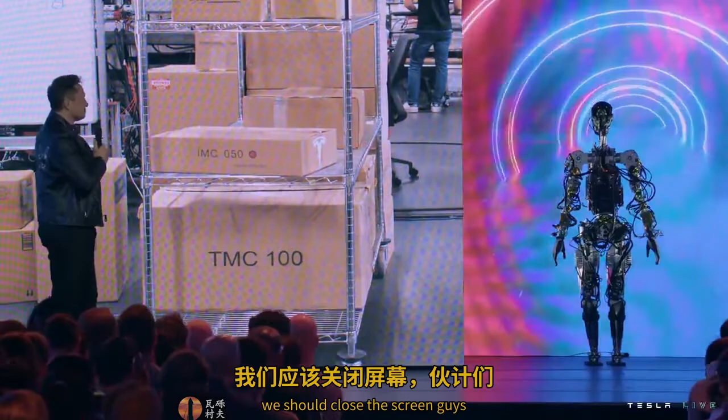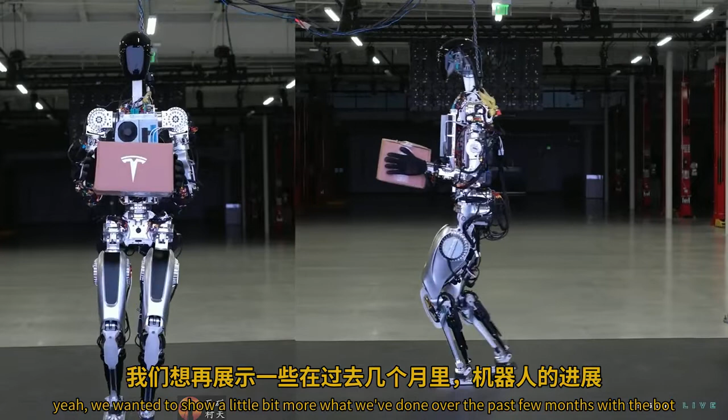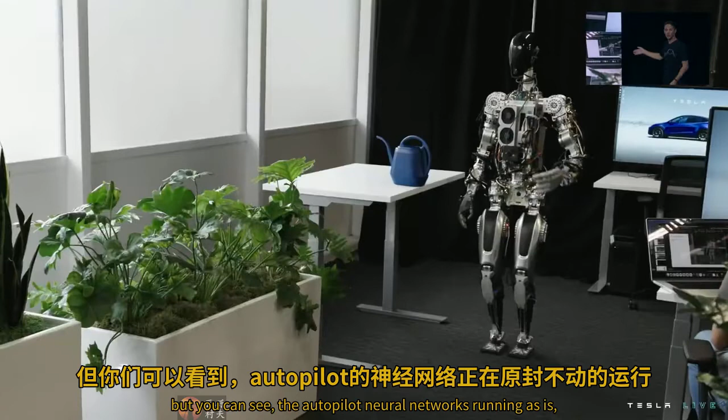Yeah, we wanted to show a little bit more what we've done over the past few months with the bot, beyond just walking around and dancing on stage. Just humble beginnings, but you can see the Autopilot neural networks running as is, just retrained for the bot directly on that new platform. That's my watering can. Yeah, when you see a rendered view, that's the world the robot sees. So it's very clearly identifying objects, like this is the object it should be picking up.

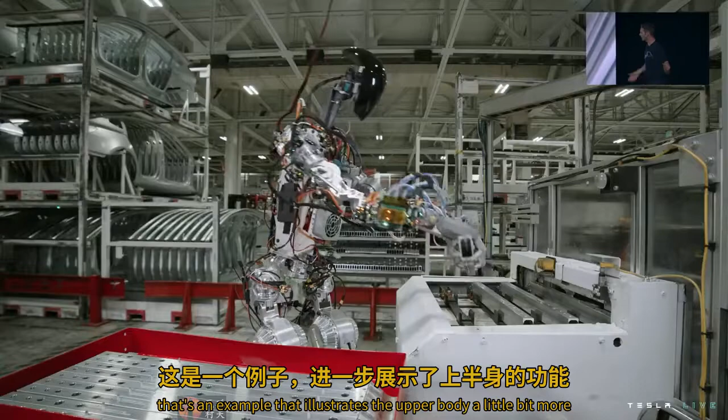We use the same process as we did for Autopilot to collect data and train neural networks that we then deploy on the robot. That's an example that illustrates the upper body a little bit more. Something that we'll try to nail down over the next few months, I would say, to perfection. This is really an actual station in the Fremont factory as well that it's working at.

And that's not the only thing we have to show today, right? Yeah, absolutely. So what you saw was what we call Bumble C. That's our sort of rough development robot using semi-off-the-shelf actuators. But we actually have gone a step further than that already. The team's done an incredible job.

And we actually have an Optimus bot with fully Tesla-designed and built actuators, battery pack, control system, everything. It wasn't quite ready to walk, but I think it will walk in a few weeks. But we wanted to show you the robot, something that's actually fairly close to what will go into production, and show you all the things it can do. So let's bring it out. Do it.

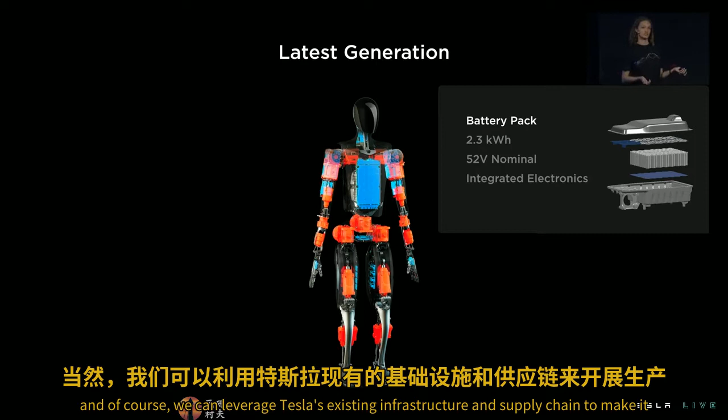So going on to our brain, it's not in the head, but it's pretty close. Also in our torso, we have our central computer.

As you know, Tesla already ships full self-driving computers in every vehicle we produce. We want to leverage both the autopilot hardware and software for the humanoid platform, but because the requirements and form factor are different, we're going to change a few things first.

It's still going to do everything that a human brain does: processing vision data, making split-second decisions based on multiple sensory inputs, and also communications. To support communications, it's equipped with wireless connectivity as well as audio support. It also has hardware-level security features, which are important to protect both the robot and the people around it.

So now that we have our core, we're going to need some limbs on this guy. We'd love to show you a little bit about our actuators and our fully functional hands as well. But before we do that, I'd like to introduce Malcolm, who's going to speak about our structural foundation for the robot.

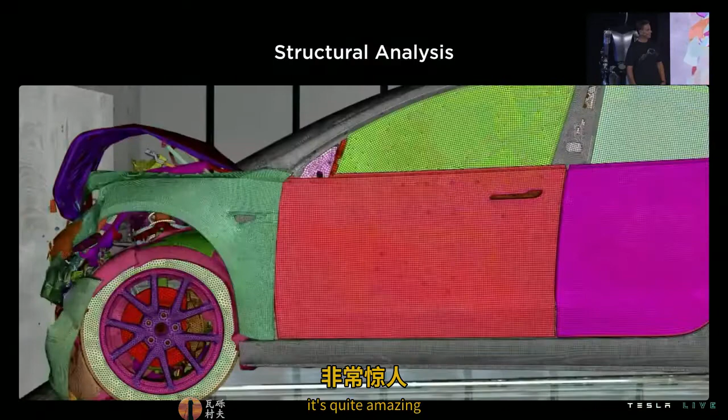Just to give you an idea of the complexity of this model, it includes every nut, bolt, and washer, every spot weld, and it has 35 million degrees of freedom. It's quite amazing, and it's true to say that if we didn't have models like this, we wouldn't be able to make the safest cars in the world.

So can we utilize our capabilities and methods from the automotive side to influence a robot? Well, we can make a model, and since we had crash software, we're using the same software here, we can make it fall down. The purpose of this is to make sure that if it falls down, ideally it doesn't, but it's superficial damage.

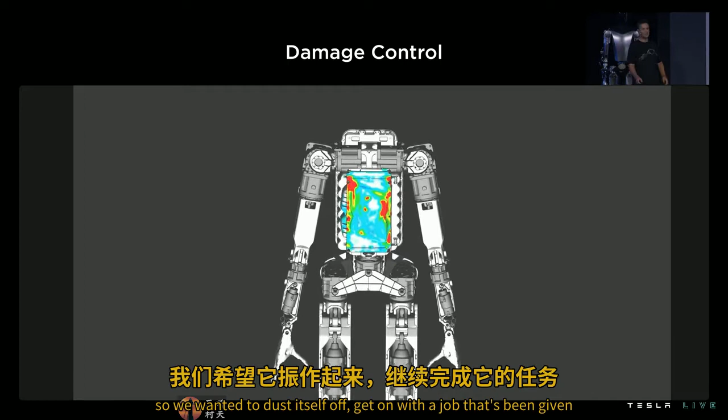We don't want it to, for example, break its gearbox in its arms. That's equivalent of a dislocated shoulder of a robot - difficult and expensive to fix. So we want it to dust itself off and get on with the job it's been given.

We can also take the same model and drive the actuators using the inputs from a previously solved model, bringing it to life. So this is producing the motions for the tasks we want the robot to do.

These tasks are picking up boxes, turning, squatting, walking upstairs. Whatever the set of tasks are, we can play to the model. This is showing just simple walking. We can create the stresses in all the components, which helps us optimize them.

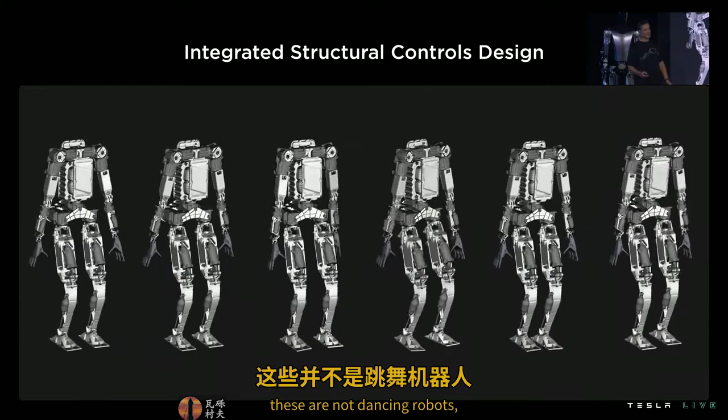These are not dancing robots. These are actually the modal behavior, the first 5 modes of the robot. Typically, when people make robots, they make sure the first mode is up around the top single figures, towards 10 hertz. The reason is to make the controls of walking easier - it's very difficult to walk if you can't guarantee where your foot is wobbling around. That's okay if you make one robot.

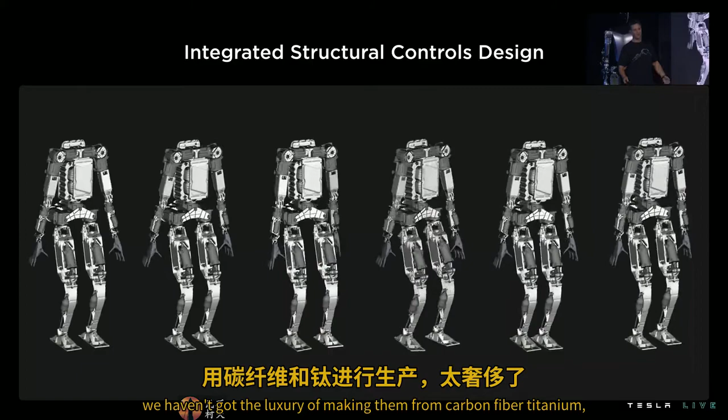We want to make thousands, maybe millions. We haven't got the luxury of making them from carbon fiber and titanium - we want to make them from plastic. Things are not quite so stiff, so we can't have these high targets. I call them dumb targets. We've got to make them work at lower targets.

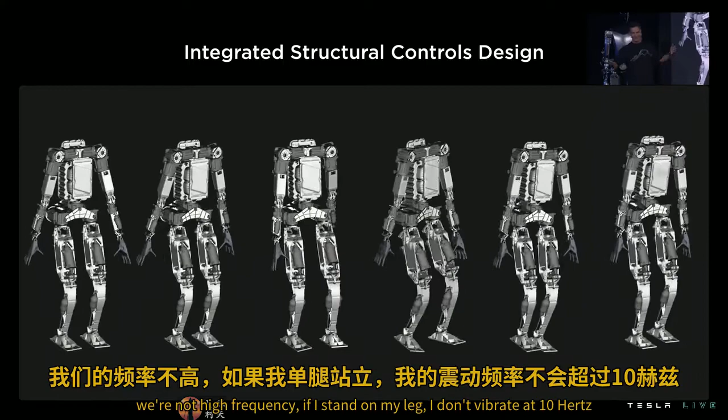So is that going to work? Well, if you think about it - sorry about this - but we're just bags of soggy jelly and bones thrown in. We're not high frequency. If I stand on my leg, I don't vibrate at 10 hertz. People operate at low frequency, so we know the robot actually can. It just makes controls harder.

So we take the information from this, the modal data and the stiffness, and feed that into the control system. That allows it to walk.

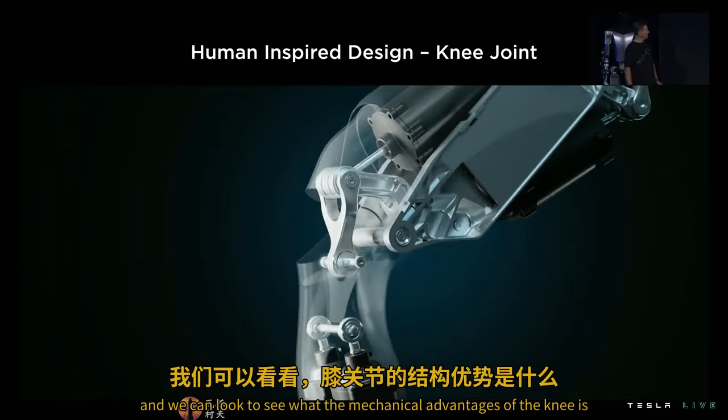Just changing tack slightly, looking at the knee. We can take some inspiration from biology and look to see what the mechanical advantage of the knee is. It turns out it actually represents quite similar to a 4-bar link, and that's quite non-linear. That's not surprising, really, because if you think when you bend your leg down, the torque on your knee is much more when it's bent than when it's straight.

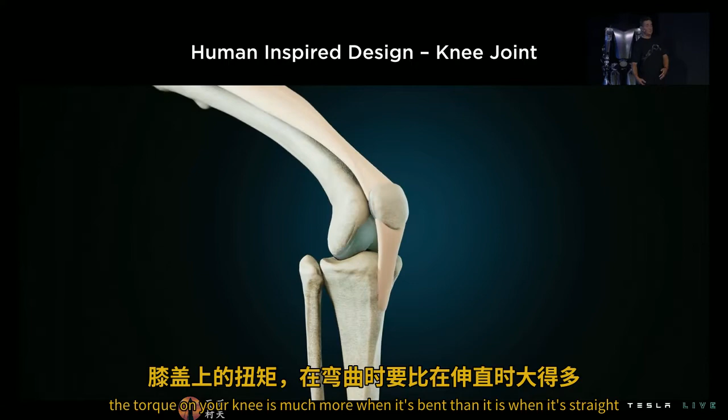So you'd expect a non-linear function, and in fact the biology is non-linear. This matches it quite accurately.

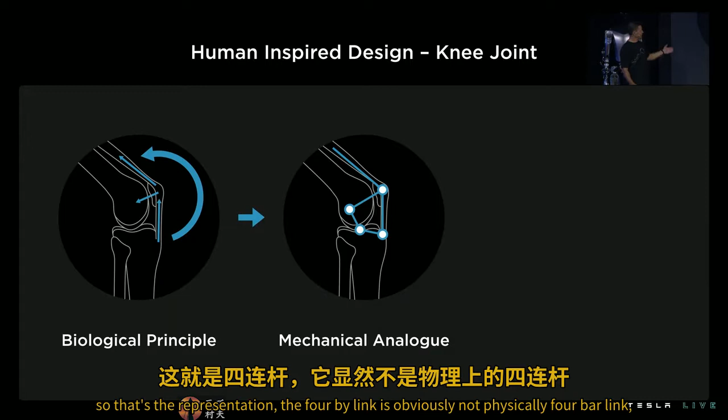So that's a representation. The 4-bar link is obviously not physically a 4-bar link, but as I said, the characteristics are similar. Me bending down though, that's not very scientific. Let's be a bit more scientific.

We've played all the tasks through this graph, and this is showing picking things up, walking, squatting, the tasks we did on the stress, and that's the torque seen at the knee against the knee bend on the horizontal axis.

This is showing the requirement for the knee to do all these tasks. I've then put a curve through it, surfing over the top of the peaks, and that's saying this is what's required to make the robot do these tasks.

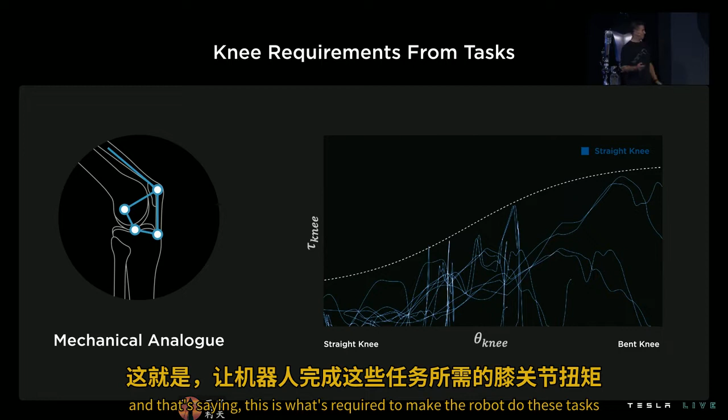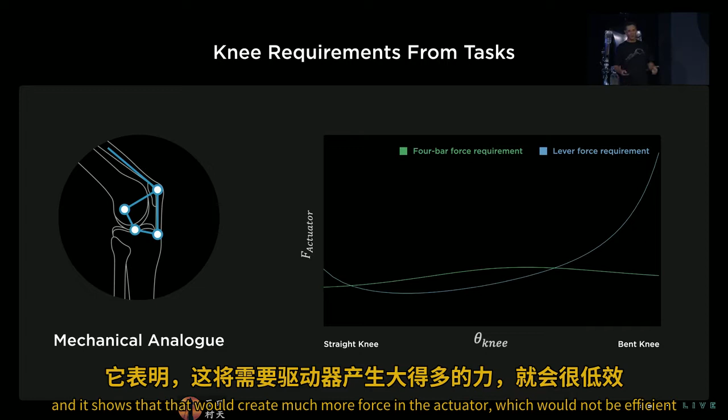So what does that look like in practice? Well, as you'll see, it's very tightly packaged in the knee. You'll see it go transparent in a second. You'll see the 4-bar link there. It's operating on the actuator. This is determining the force and the displacements on the actuator.

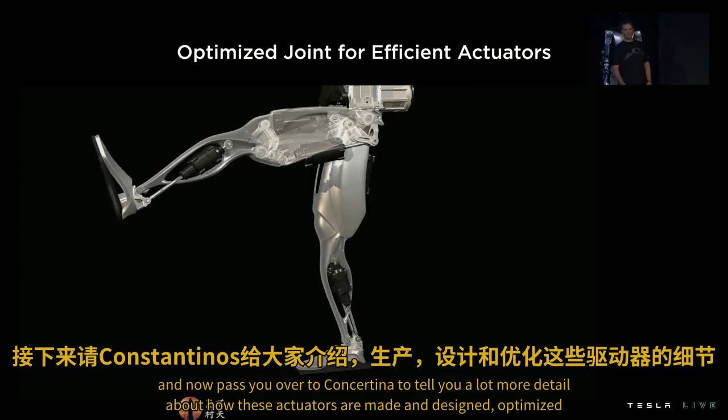I'll now pass you over to Constantinos, who'll tell you a lot more detail about how these actuators are made and designed and optimized. Thank you.

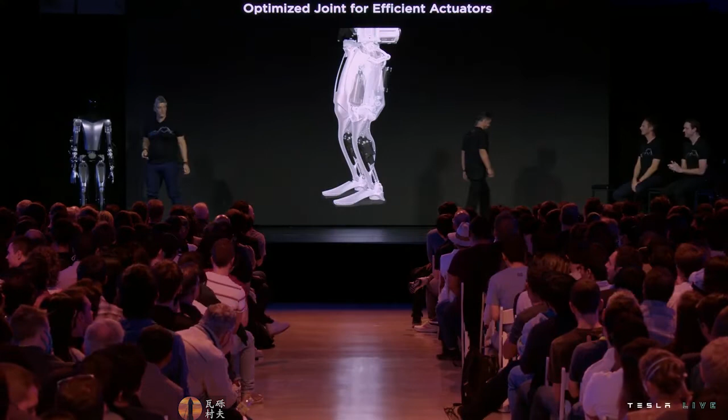So I would like to talk to you about the design process and the actuator portfolio in our robot. There are many similarities between a car and a robot when it comes to powertrain design.

The most important thing that matters here is energy, mass, and cost. We are carrying over most of our designing experience from the car to the robot.

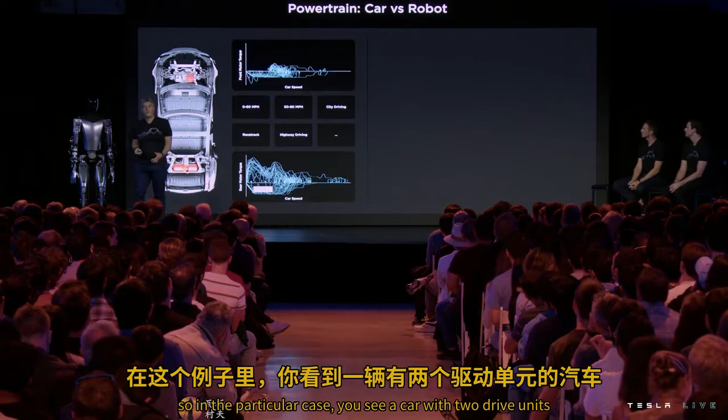So in this particular case, you see a car with 2 drive units, and the drive units are used in order to accelerate the car's 0 to 60 miles per hour time, or drive a city drive cycle.

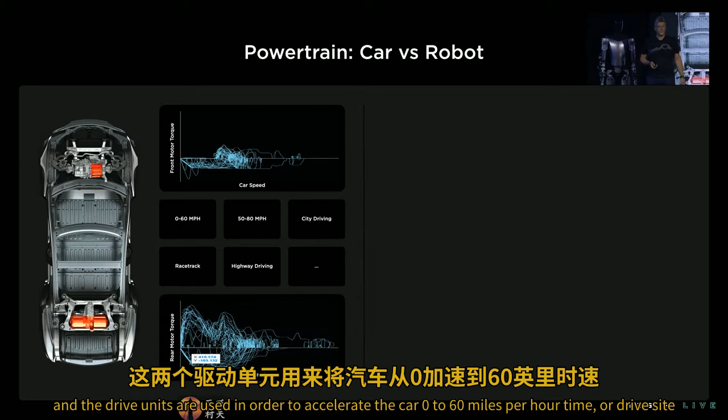While the robot has 28 actuators, it's not obvious what the tasks are at actuator level. So we have tasks that are higher level, like walking or climbing stairs or carrying a heavy object, which need to be translated into joint specs.

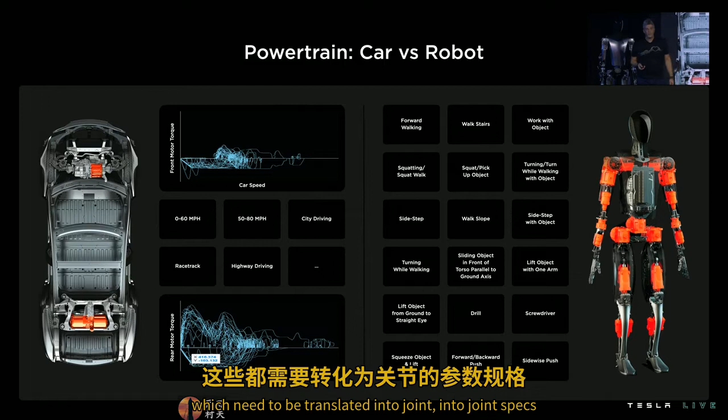Therefore, we use our model that generates the torque speed trajectories for our joints, which is subsequently fed into our optimization model to run through the optimization process.

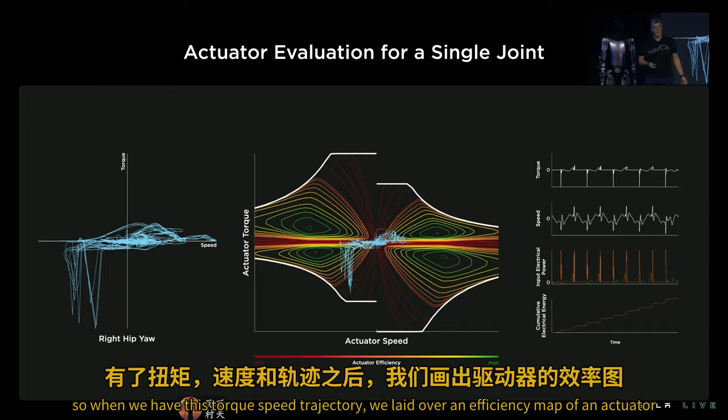And the energy, cumulative energy for the task versus time.

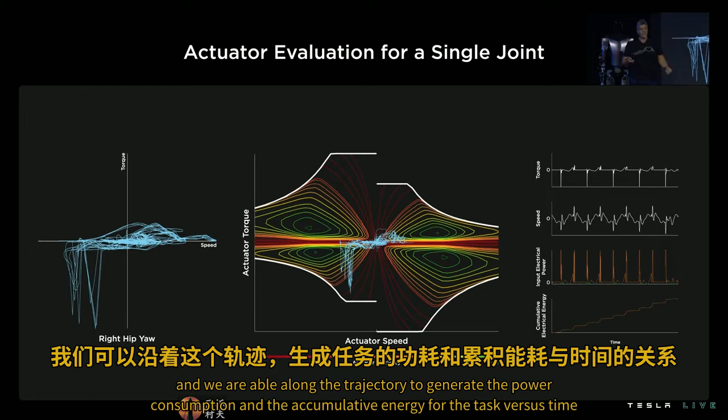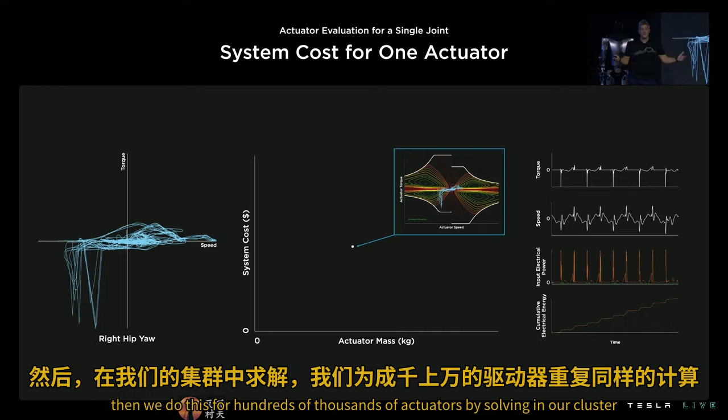So this allows us to define the system cost for the particular actuator and put a single point into the cloud. Then we do this for hundreds of thousands of actuators by solving in our cluster, and the red line denotes the Pareto front, which is the preferred area where we will look for our optimal.

So the X denotes the preferred actuator design we have picked for this particular joint. So now we need to do this for every joint.

We have 28 joints to optimize, and we parse our cloud again for every joint spec, and the red X's this time denotes the bespoke actuator designs for every joint.

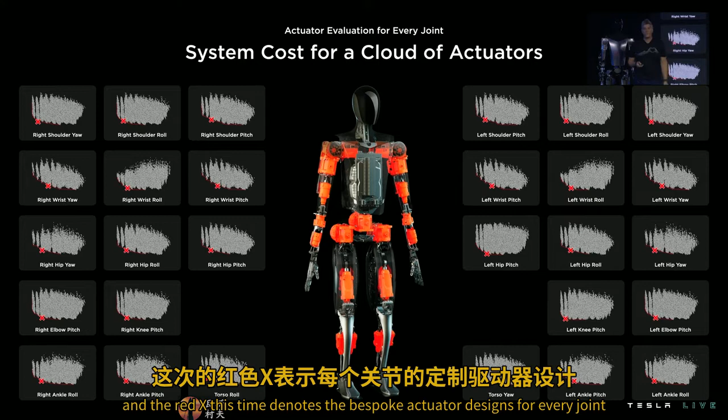The problem here is that we have too many unique actuator designs, and even if we take advantage of the symmetry, there are still too many. In order to make something mass manufacturable, we need to be able to reduce the amount of unique actuator designs.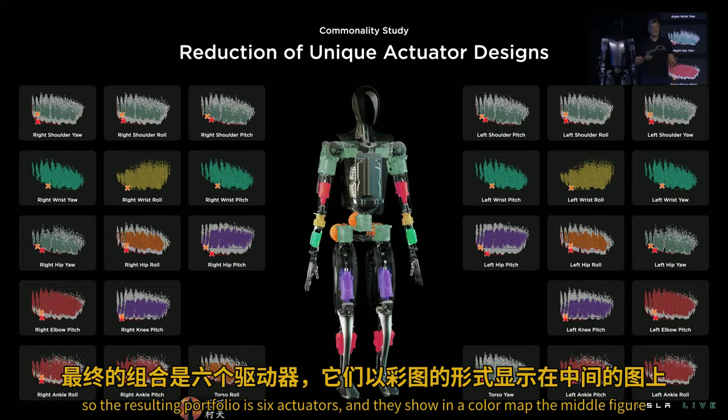Therefore, we run something called a commonality study, which parses our cloud again, looking this time for actuators that simultaneously meet the joint performance requirements for more than one joint at the same time. The resulting portfolio is 6 actuators, shown in a color map in the middle figure.

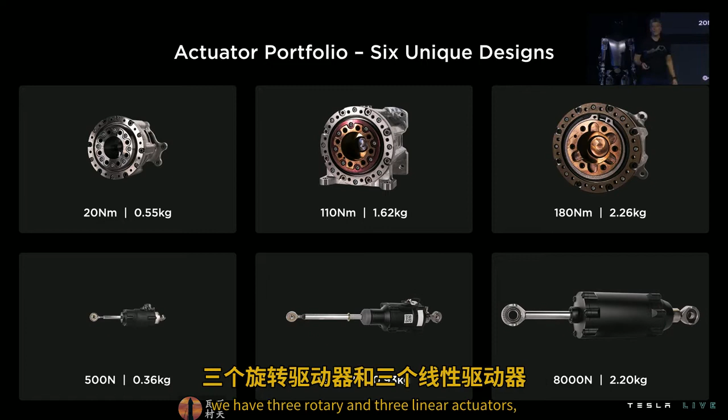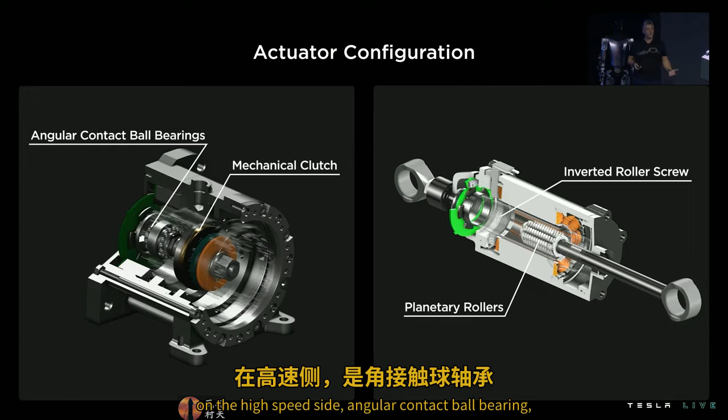The actuators can also be viewed in this slide. We have 3 rotary and 3 linear actuators, all of which have great output force or torque per mass. The rotary actuator in particular has a mechanical clutch integrated on the high-speed side angular contact ball bearing, and on the low-speed side a cross-roller bearing, with a strain wave gear train. There are 3 integrated sensors here and a bespoke permanent magnet machine.

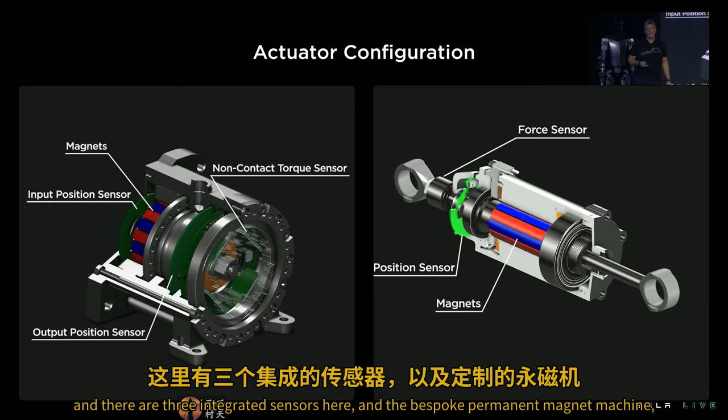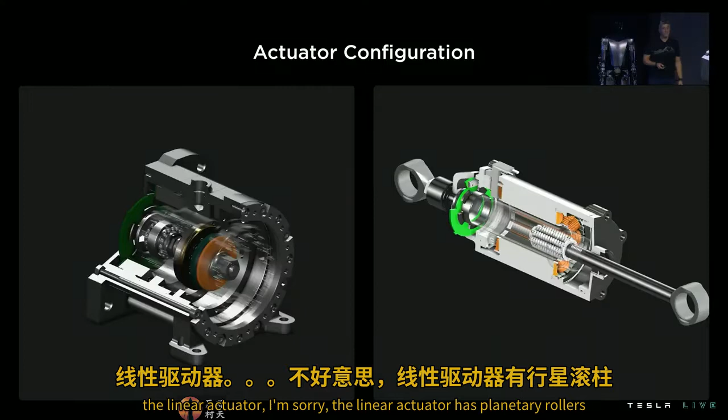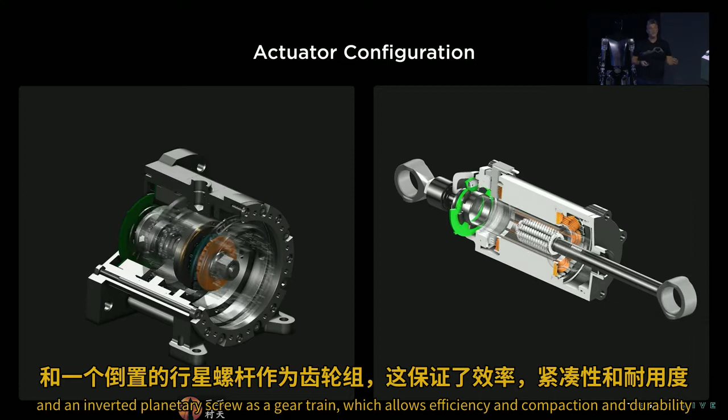The linear actuator has planetary rollers and an inverted planetary screw as a gear train, which allows efficiency, compaction, and durability. So in order to demonstrate the force capability of our linear actuators, we have set up an experiment to test it under its limits.

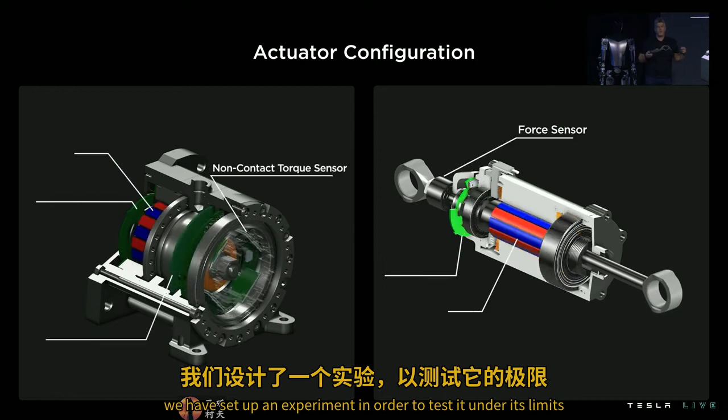And I will let you enjoy the video.

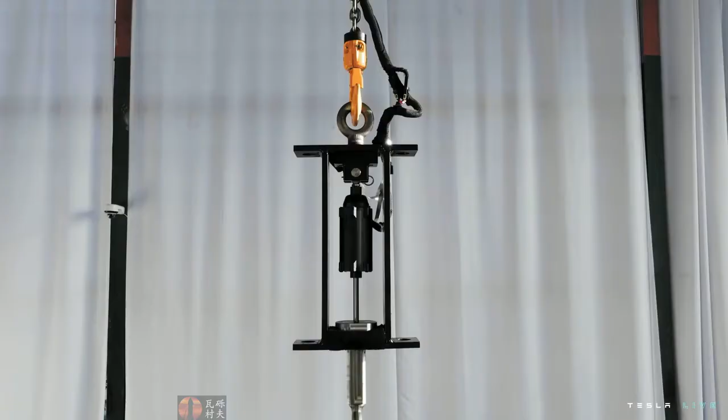So our actuator is able to lift a half-ton, 9-foot concert grand piano.

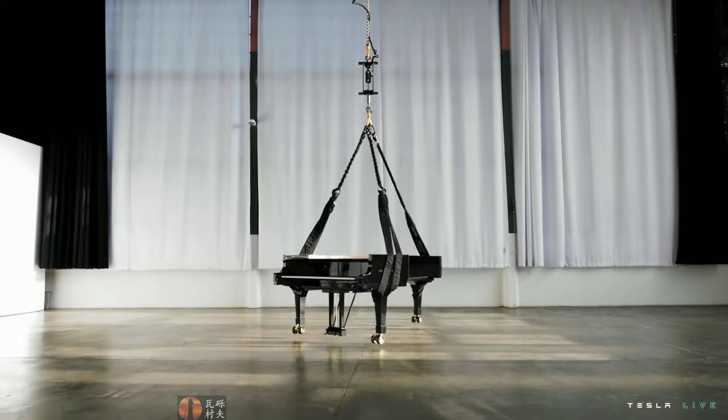And this is a requirement, not something nice to have, because our muscles can do the same when they are direct driven. When directly driven, our quadricep muscles can do the same thing. It's just that the knee is an up-gearing linkage system that converts force into velocity at the end effector of our heels, for purposes of giving the human body agility. So this is one of the main things that are amazing about the human body.

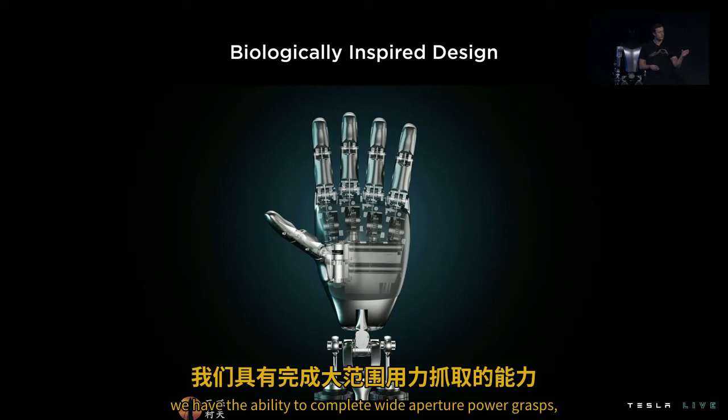We have 5 fingers and an opposable thumb. Our fingers are driven by metallic tendons that are both flexible and strong. We have the ability to complete wide aperture power grasps while also being optimized for precision gripping of small, thin, and delicate objects.

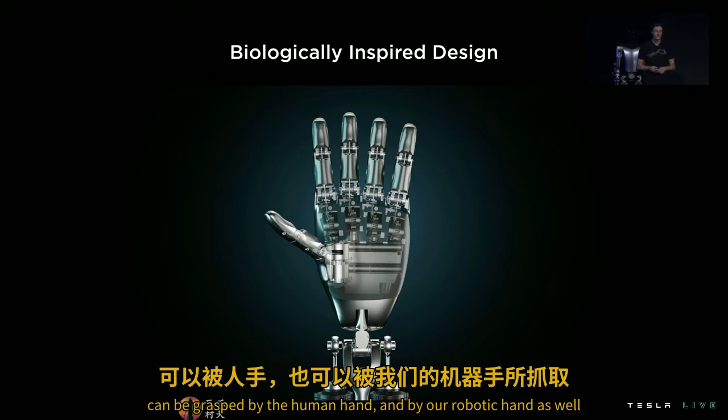So why a human-like robotic hand? Well, the main reason is that our factories and the world around us is designed to be ergonomic. So what that means is that it ensures objects in our factory are graspable, but it also ensures that new objects we may have never seen before can be grasped by the human hand and by our robotic hand as well. The converse is pretty interesting because it's saying that these objects are designed to our hand, instead of having to make changes to our hand to accommodate a new object.

Some basic stats about our hand: it has 6 actuators and 11 degrees of freedom. It has an in-hand controller, which drives the fingers and receives sensor feedback. Sensor feedback is really important to learn more about the objects we're grasping, and also for proprioception, which is the ability for us to recognize where our hand is in space.

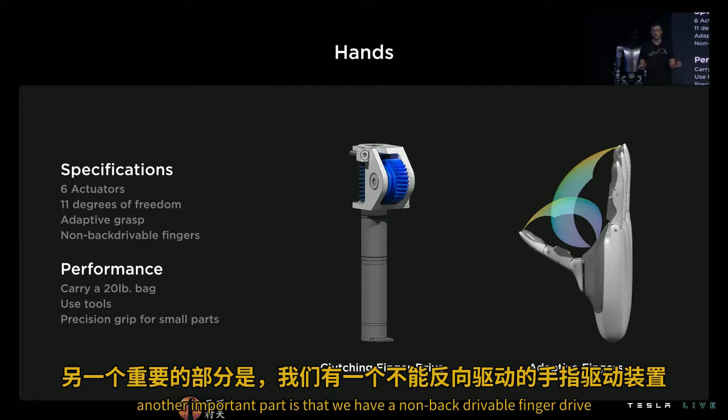One of the important aspects of our hand is that it's adaptive. This adaptability involves complex mechanisms that allow the hand to adapt to the object being grasped. Another important part is that we have a non-back drivable finger drive. This clutching mechanism allows us to hold and transport objects without having to turn on the hand motors.

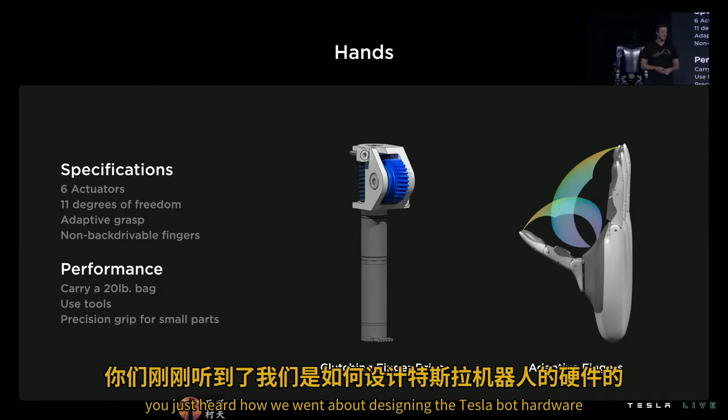All right, so all those cool things we've shown earlier in the video were possible in just a matter of a few months, thanks to the amazing work we've done on Autopilot over the past few years. Most of those components ported quite easily over to the bot's environment. If you think about it, we're just moving from a robot on wheels to a robot on legs. So some of the components are pretty similar, and some others require more heavy lifting.

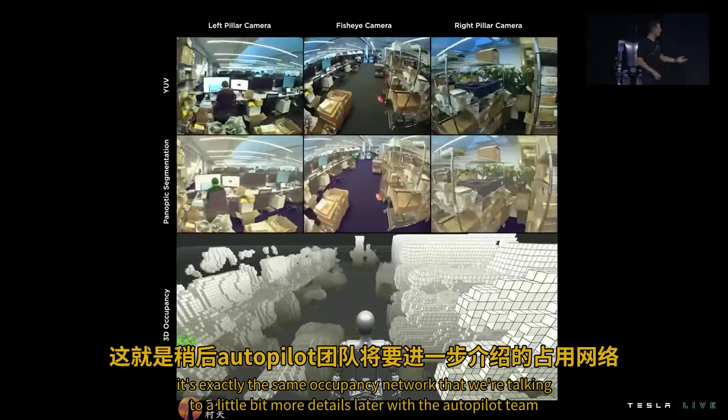So for example, our computer vision neural networks were ported directly from Autopilot to the bot's situation. It's exactly the same occupancy network that we'll talk into a little bit more details later with the Autopilot team that is now running on the bot here in this video. The only thing that changed really is the training data that we had to recollect.

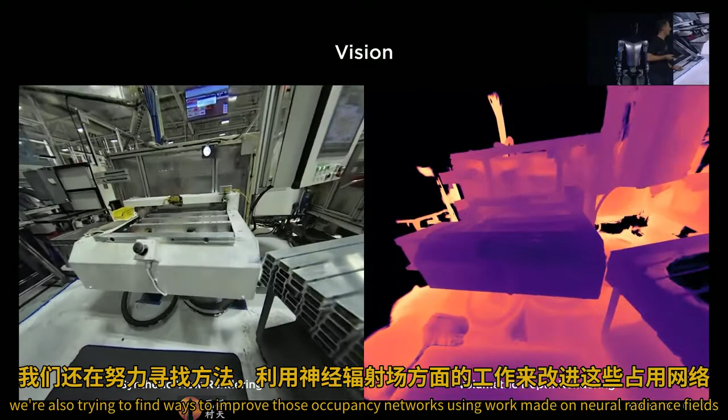We're also trying to find ways to improve those occupancy networks using work made on neural radiance fields to get really great volumetric rendering of the bot's environments. For example, here, some machinery that the bot might have to interact with.

Another interesting problem to think about is, in indoor environments, mostly with absence of GPS signal, how do you get the bot to navigate to its destination? Say, for instance, to find its nearest charging station.

So we've been training more neural networks to identify high-frequency features, key points within the bot's camera streams, and track them across frames over time as the bot navigates through its environment. And we're using those points to get a better estimate of the bot's pose and trajectory within its environment as it's walking.

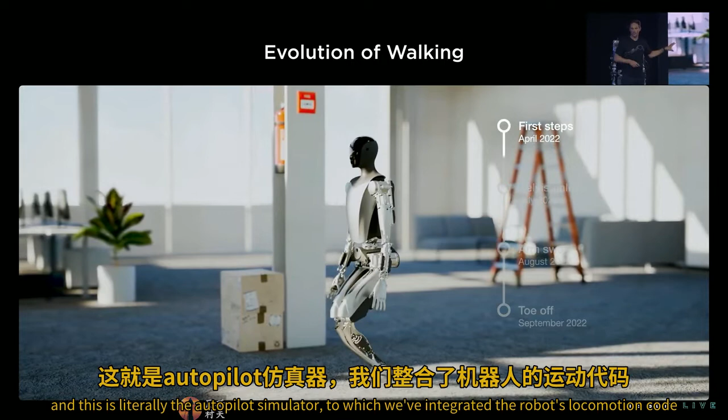We also did quite some work on the simulation side. And this is literally the Autopilot simulator, to which we've integrated the robot's locomotion code. And this is a video of the motion control code running in the Autopilot simulator, showing the evolution of the robot's walk over time. And so as you can see, we started quite slowly in April and started accelerating as we unlock more joints and deploy more advanced techniques like arms balancing over the past few months.

And so locomotion is specifically one component that's very different as we're moving from the car to the bot's environment. And so I think it warrants a little bit more depth, and I'd like my colleagues to start talking about this now.

Thank you, Milan. Hi, everyone. I'm Felix. I'm a robotics engineer on the project, and I'm going to talk about walking. Walking seems easy, right? People do it every day. You don't even have to think about it. But there are some aspects of walking which are challenging from an engineering perspective.

For example, physical self-awareness. That means having a good representation of yourself. What is the length of your limbs? What is the mass of your limbs? What is the size of your feet? All that matters. Also, having an energy-efficient gait. You can imagine there's different styles of walking, and not all of them are equally efficient.

Most important, keep balance, don't fall. And of course, also coordinate the motion of all of your limbs together. So now, humans do all of this naturally, but as engineers or roboticists, we have to think about these problems. In the following, I'm going to show you how we address them in our locomotion planning and control stack.

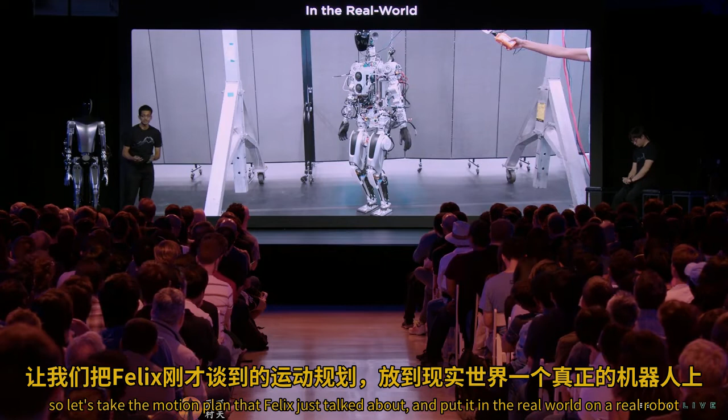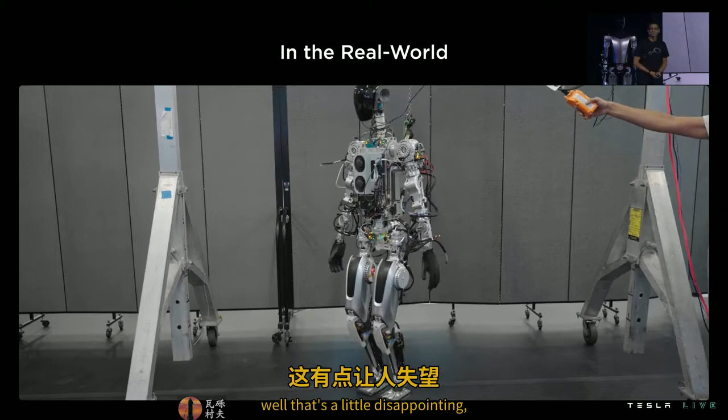So let's take the motion plan that Felix just talked about and put it in the real world on a real robot. Let's see what happens. It takes a couple steps and falls down. Well, that's a little disappointing. But we are missing a few key pieces here, which will make it walk.

Now, as Felix mentioned, the motion planner is using an idealized version of itself and a version of reality around it. This is not exactly correct. It also expresses its intention through trajectories and wrenches. Wrenches are forces and torques that it wants to exert on the world to locomote.

Reality is way more complex than any sim or model. Also, the robot is not simplified. It's got vibrations and modes, compliance, sensor noise, and on and on and on. So what does that do to the real world when you put the bot in the real world? Well, the unexpected forces cause unmodeled dynamics, which essentially the planner doesn't know about, and that causes destabilization, especially for a system that is dynamically stable like biped locomotion.

So what can we do about it? Well, we measure reality. We use sensors and our understanding of the world to do state estimation. And here you can see the attitude and pelvis pose, which is essentially the vestibular system in a human, along with the center of mass trajectory being tracked when the robot's walking in the office environment.

Now we have all the pieces we need in order to close the loop. So we use our better bot model, we use the understanding of reality that we've gained through state estimation, and we compare what we want versus what we expect that reality is doing to us in order to add corrections to the behavior of the robot. Here, the robot certainly doesn't appreciate being poked, but it does an admirable job of staying upright.

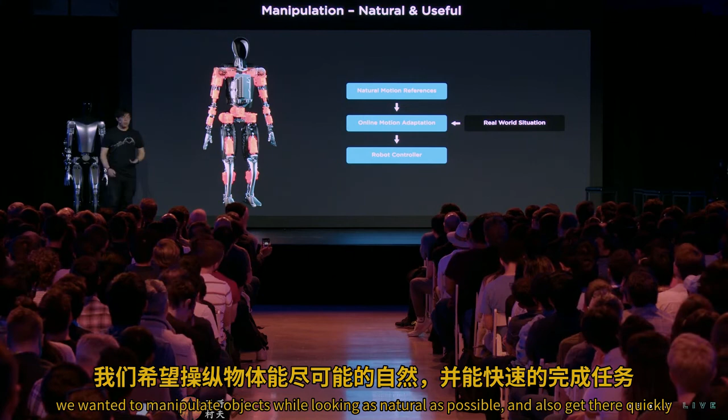Hi, everyone. My name is Eric, robotics engineer on TeslaBot, and I want to talk about how we've made the robot manipulate things in the real world. We wanted to manipulate objects while looking as natural as possible, and also get there quickly. So what we've done is we've broken this process down into two steps. First is generating a library of natural motion references, or we could call them demonstrations. And then we've adapted these motion references online to the current real-world situation.

So let's say we have a human demonstration of picking up an object. We can get a motion capture of that demonstration, which is visualized right here as a bunch of keyframes representing the locations of the hands, the elbows, the torso. We can map that to the robot using inverse kinematics. And if we collect a lot of these, now we have a library that we can work with.

But a single demonstration is not generalizable to the variation in the real world. For instance, this would only work for a box in a very particular location. So what we've also done is run these reference trajectories through a trajectory optimization program, which solves for where the hand should be, how the robot should balance when it needs to adapt the motion to the real world. So for instance, if the box is in this location, then our optimizer will create this trajectory instead.

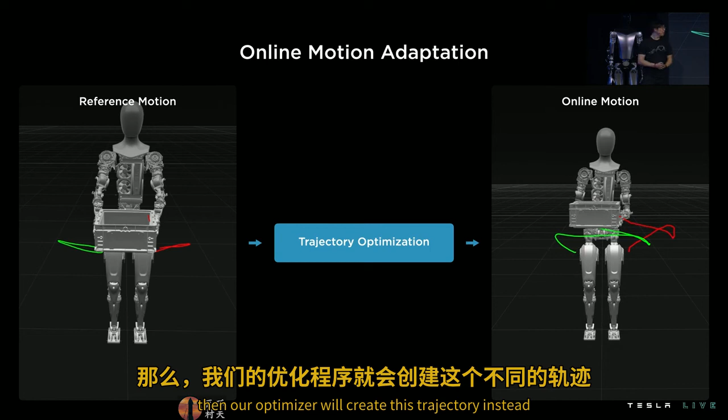Next, Milan's going to talk about what's next for the Optimus TeslaBot. Thanks. Thanks, Eric.

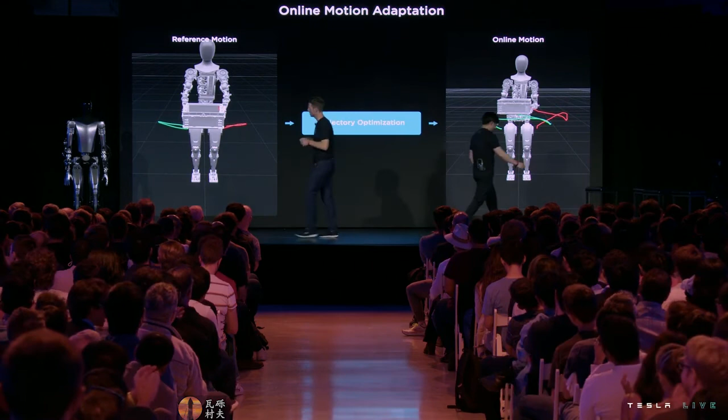Right, so hopefully by now you guys got a good idea of what we've been up to over the past few months. We started having something that's usable, but it's far from being useful. There's still a long and exciting road ahead of us. I think the first thing within the next few weeks is to get Optimus at least at par with Bumble C, the other bot prototype you saw earlier, and probably beyond.

We're also going to start focusing on the real use case at one of our factories, and really going to try to nail this down and iron out all the elements needed to deploy this product in the real world. I was mentioning earlier, indoor navigation, graceful fall management, or even servicing, all components needed to scale this product up. But I don't know about you, but after seeing what we've shown tonight, I'm pretty sure we can get this done within the next few months or years and make this product a reality and change the entire economy.

So I would like to thank the entire Optimus team for all their hard work over the past few months. I think it's pretty amazing. All of this was done in barely 6 or 8 months. Thank you very much.